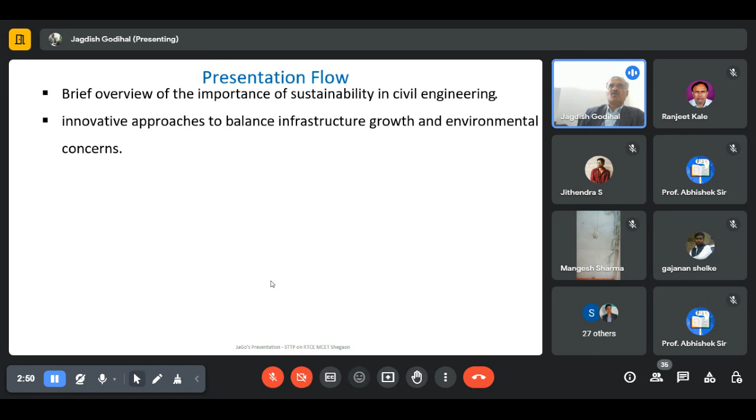We cannot neglect development, but at the same time, not at the cost of the environment. So we have to find a via media, a solution so that development happens while the environment is also protected. That is the concept of sustainable development I'm going to discuss.

Then I'll talk about smart solutions, especially regarding materials - how using smart solutions I can recycle materials so that natural raw materials stay intact. Using these recycled materials, I need to characterize them so I can use them as fillers instead of 100% raw materials obtained from natural exploration.

I'm going to use the majority of recycled materials where smart solutions are required - that is the concept of smart solutions and their application in infrastructure development. Then we developed a concept called the smart dwelling system, where we actually conducted experimentation and practicals.

We erected small cubicle buildings wherein we used sensors and IoT to monitor the thermal measurements as well as air pollution within the dwelling we developed.

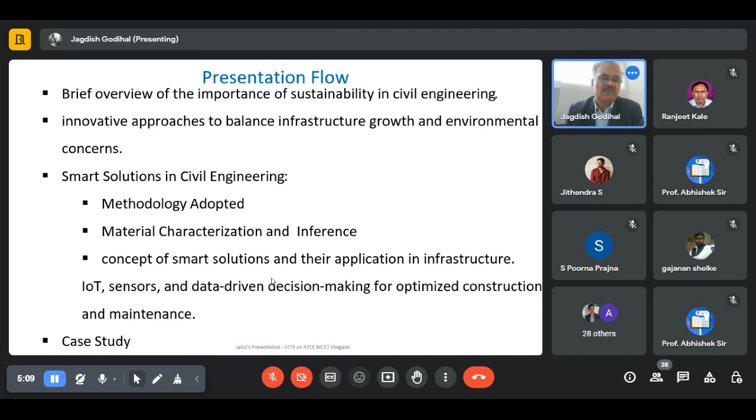Lastly, I'm going to talk about the case study of what we are doing now, and finally summarize with a take-home message. This will take about an hour, and after that, we can have a discussion. If anyone has questions, you are free to ask.

Coming to that, first, when we talk about sustainability and technology, we can talk about the integration of the two. First we try to understand the environment framework. As we are aware, the environment is the physical surroundings where we all live together and interact with physical, biotic, and abiotic components.

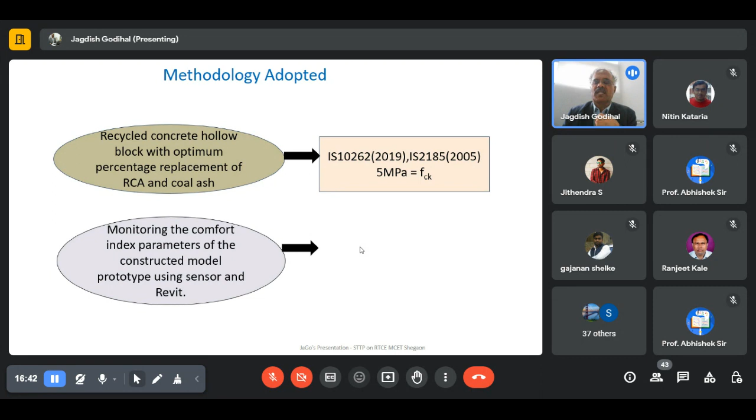Using these two materials, we are preparing the blocks catering to IS specifications, where a minimum 5 MPa strength is required to be considered load-bearing in concrete manufacturing. We are monitoring comfort index parameters using sensors and IoT in the constructed models. Three prototype models were constructed, and we analyzed the data using software, with respect to thermal comfort, overall comfort index including pollution level, and temperature and humidity monitored using sensors mounted inside the model.

If you look at the flow diagram of this study on recycled coarse aggregate and coal ash, the study outcome complies with three dimensions of sustainability: social, environment, and economy. We refer to IGBC, World Health Organization standards, American code systems, and Indian code systems while preparing the concrete for manufacturing the hollow blocks.

We have created some cavities in the hollow blocks, and in those cavities we are filling agricultural waste, whether it's areca nut, rice husk ash, or coconut fibers. These act as thermal insulators.

This is an experiment we have done so that by using recycled concrete aggregates instead of natural aggregates, we reduce greenhouse gas emissions, that is, carbon emissions. That is also an environmental index we try to work out.

We also look at direct and indirect costs, from an economy point of view, we're talking about three dimensions here. One is economy: we are not using 100% natural aggregates, 100% natural sand, or 100% natural cement, the ingredients required to prepare concrete, as you are all aware. We try to reduce these without reducing the requisite compressive strength needed to construct the building.

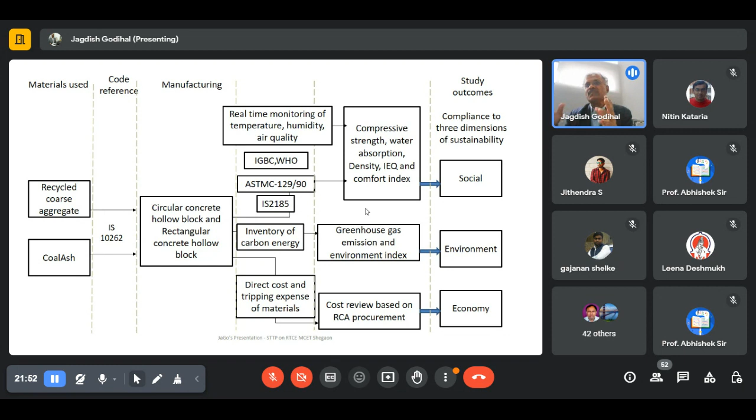From the social point of view, we are talking about the comfort index within the building. When we talk about comfort index, we mean achieving it without using artificial comfortness, in the sense without using air conditioners, as well as without artificial daylighting. That means using materials in construction, using materials as fillers, and changing the construction methods. We try to achieve a comfortable index which will be more effective from the health point of view with respect to the social dimension. This is what our study is concerned about.

Here we are using the concept of sustainability as well as technology. So these are the materials we have used: natural materials as well as recycled materials. We have used all these things.

These are the different proportions, whether it is rectangular hollow blocks or circular hollow blocks, like that. From that angle, we are using recycled concrete aggregates, and natural coal ash at 0%. That is the natural mix, mix 1 to mix 9, with different proportions of coal ash, as well as recycled concrete coarse aggregates and recycled concrete fine aggregates. These different mixes we have prepared, and then tested in our lab and all those things.

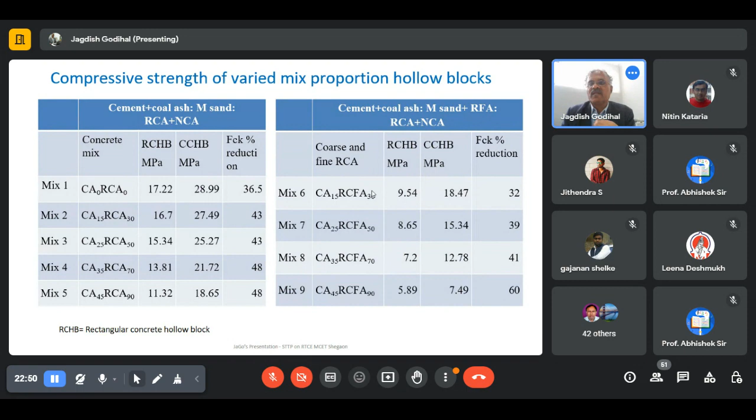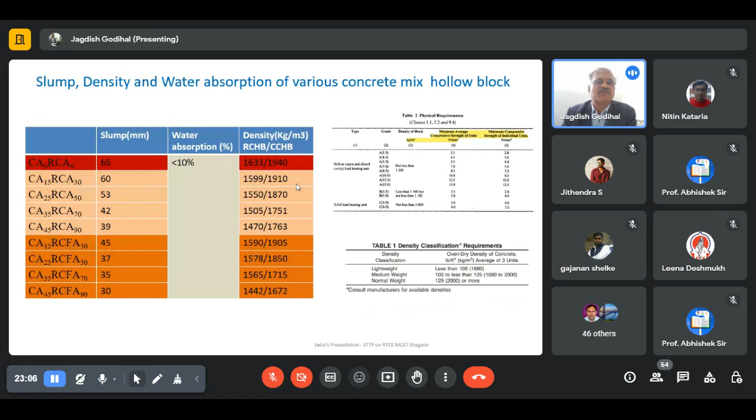Ultimately, we found out what compressive strength we are getting. This study has been done very judiciously, and from that angle, prior to that, many tests have been conducted. These are all the tests we have conducted, and these are the results we obtained, which are falling in line with both IS codes as well as the American concrete codes and all those things.

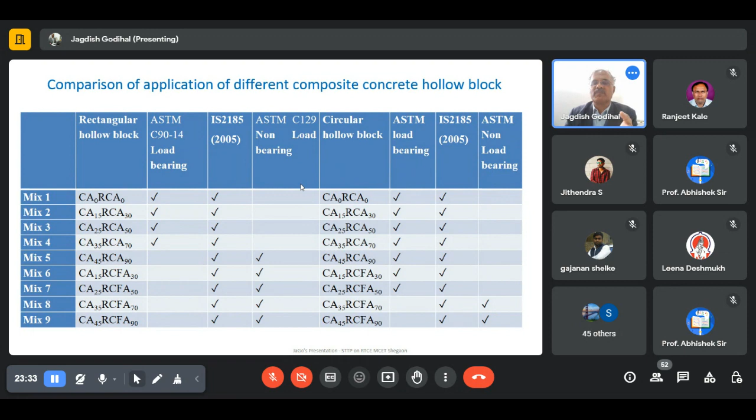If you look into the comparison of ASTM, that is American code, as well as Indian IS codes, we compared both rectangular as well as circular hollow blocks, to determine for non-load bearing applications which mix will be suitable. This is what we did. Then ultimately, how we decided this mix and all those things is based on the analysis.

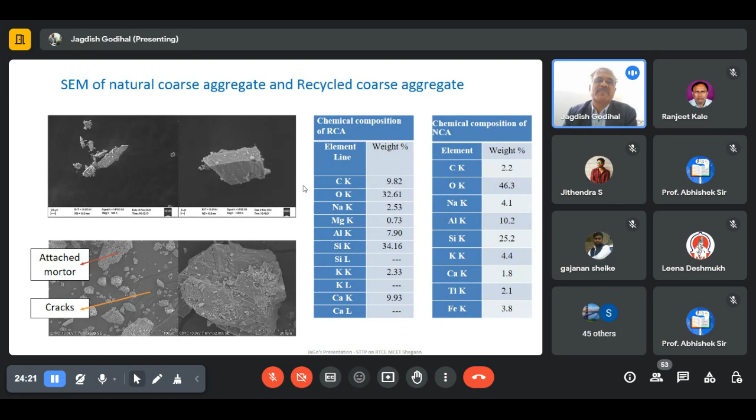We have done the material characterization, and its impact on strength and thermal performance. We have done material analysis with SEM of natural aggregates as well. Then chemical composition analysis, this is very important, so that ultimately you can decide the proportion of the mix where it will be gelled together, and produce concrete which should be almost the same as natural materials. So this analysis, whether EDX or SEM analysis of both natural and recycled coarse aggregate, is very important to decide the proper mix. That is what we have done.

Based on that, we have done some characterization inferences. The ash with higher content of unburned carbon has more porous and vesicular texture, and consequently crushes more under compacting and loading. That means we need to strengthen this. How are we going to strengthen this?

Why are we doing this material characterization? To understand the SWOT: what is the strength of this material, what is the weakness of this material. So that means we are talking about composite materials, we are making a composite. Concrete, you know, concrete is a composite material. Ultimately, the strength of one material we try to incorporate to address the weakness of the other material. Then we are going to come up with a very good material which can achieve the desired property, whether it's for load bearing or non-load bearing activity, whatever you want from that angle. So then again, we have done the thermal conductivity of the concrete, because we are talking about thermal index.

We're talking about thermal comfort within the house, 365 days. When it is 365 days within the house, we already mentioned we are not going to use any artificial air conditioning. We want to keep intact a conducive temperature of 20 to 25 degrees throughout the year. So here we talk about the materials used in construction, materials used as filler materials, and the method of construction.

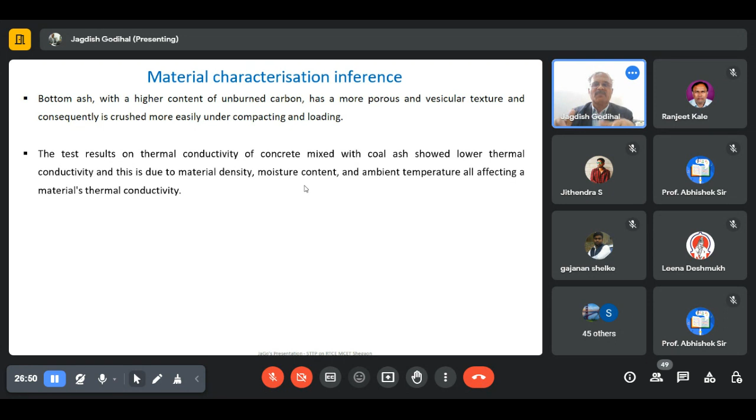We also talk about the indoor environment and indoor air pollution. That means the pollution barriers - how these materials, whether construction materials or filler materials, will act as pollution barriers and arrest the pollutants entering into the house. From that angle, the study is going on.

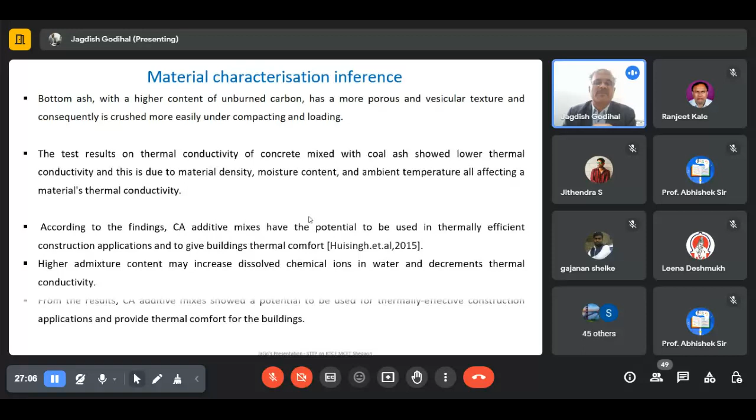In order to get the desired strength, sometimes we are using additive mixtures - admixtures we are going to use. These are all the things we did.

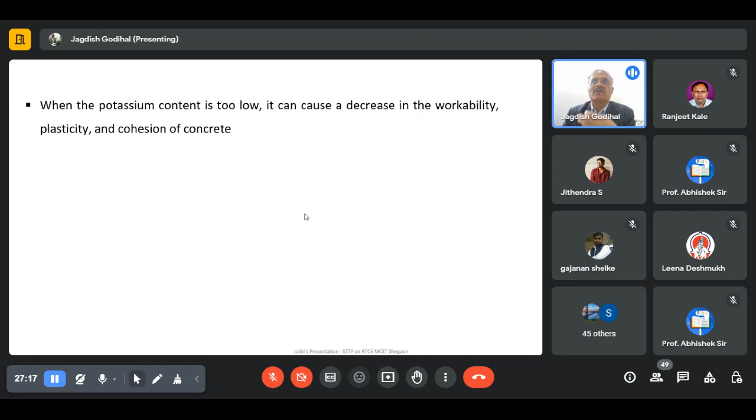From the SEM analysis, we found the potassium content is low, and that's why there is a decrease in the workability, plasticity, and cohesion of the concrete. So we tried to improve and make up for that. That is what we did.

Then again, the effect of recycled concrete aggregate on thermal conductivity, reduced from 1.2 watt per m-K composition for natural aggregate, that is 100%, down toward 0% in the concrete mix - meaning we talk about using recycled aggregate instead.

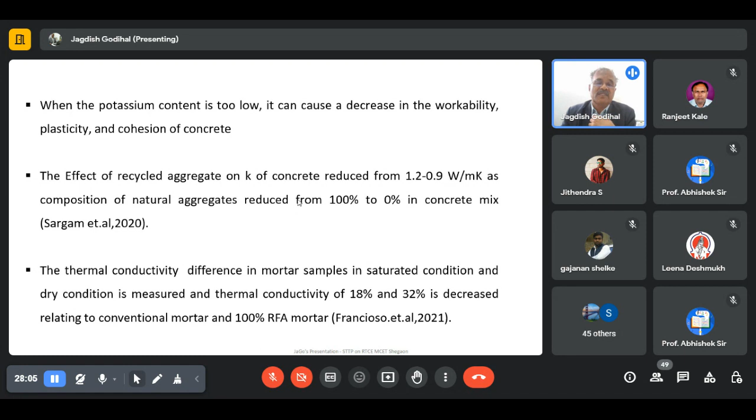Then the thermal conductivity for dry conditions showed an 18% and 32% decrease related to conventional mortar when using 100% recycled fine aggregate mortar. This is based on literature we have taken, and using this we conducted the experiment.

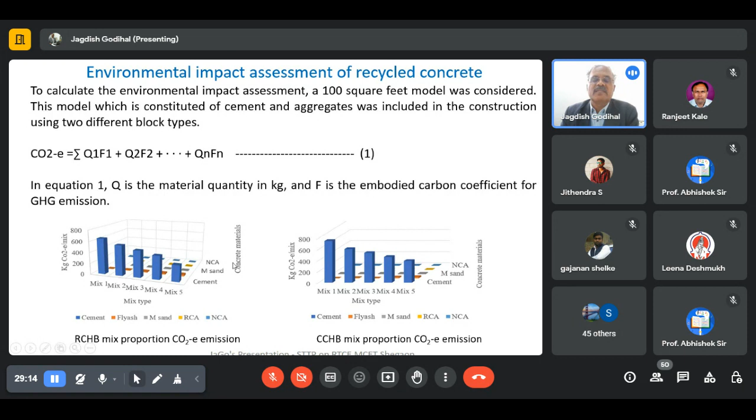We calculated how much greenhouse gas emissions will occur based on the different proportions. As you reduce more cement and use more natural aggregates, you get less carbon emissions. That is what the study shows.

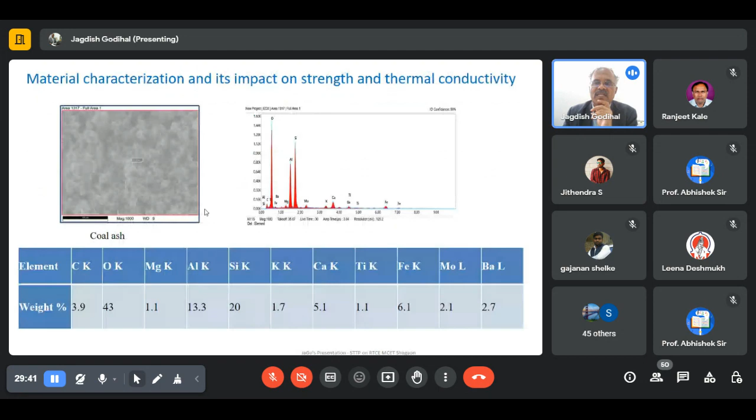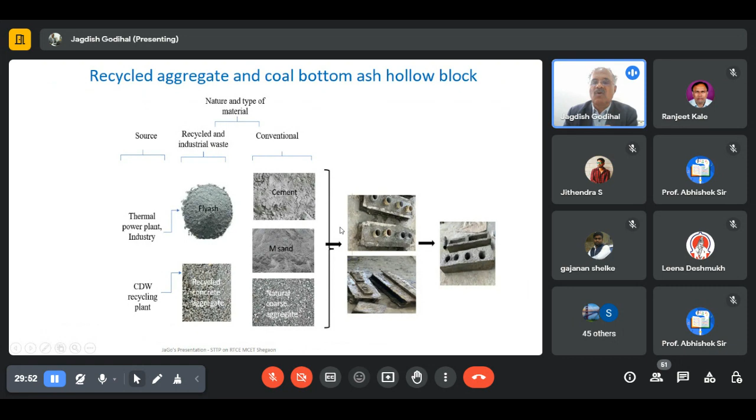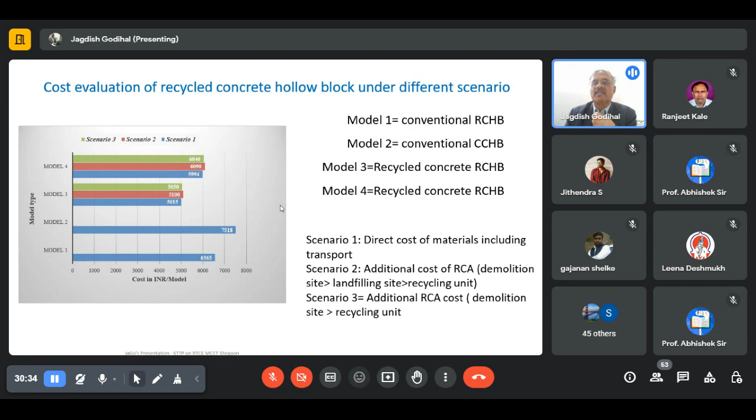In these cavities, we filled sugarcane bagasse as well as coconut fibers as filler materials. This is the study done with respect to economy - how far we bring these recycled materials and the related cost. We considered three scenarios: direct cost of material including transport; additional cost of RCA from demolition site, landfilling site, and recycling unit; and additional recycled concrete aggregate cost.

Then the second part, we talk about the monitoring - meaning the models we constructed. We are comparing these with blocks, the units constructed using the available blocks in the market.

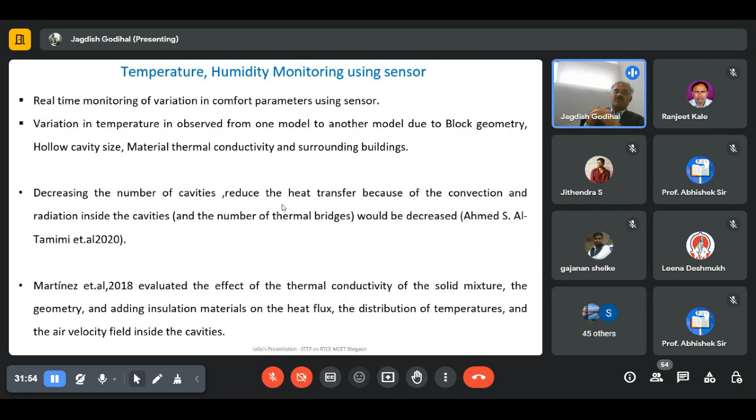Those blocks are made out of full natural aggregates and full cement, with no recycled material used and no cavities. That one block we have constructed. Then for the remaining two blocks, we manufactured hollow concrete blocks with cavities, both rectangular and circular. We monitored all the thermal as well as humidity parameters from that angle, and then compared which one, rectangular or circular cavity hollow block unit, is more comfortable with respect to thermal comfort as well as comfort index.

This is the experimental setup we have done. These are the units we completed: natural blocks without cavity, rectangular blocks with cavities, and circular cavities in a rectangular block. Along with that, we have used sensors, which you can see here, to take the readings.

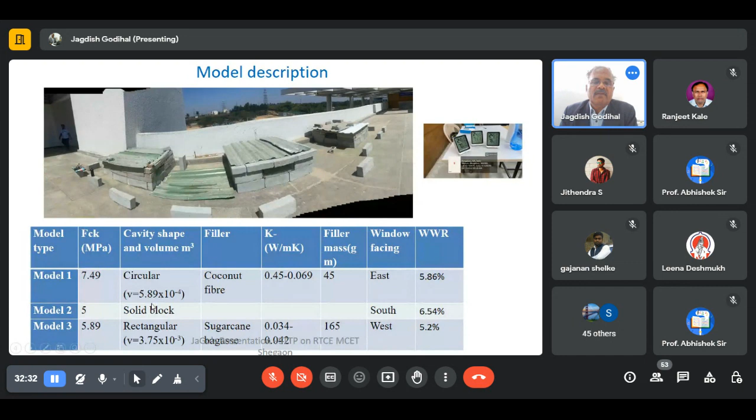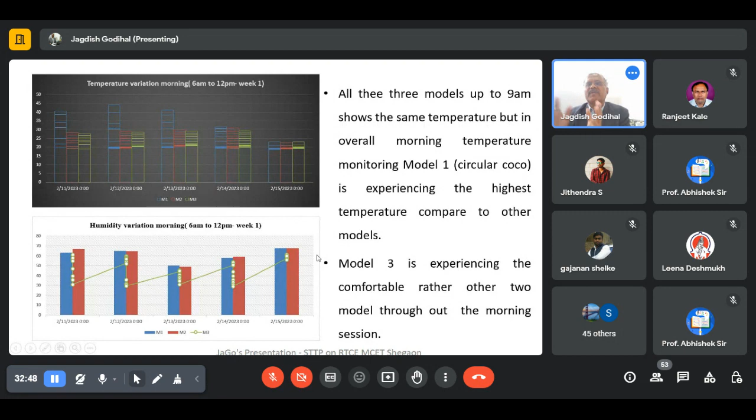So we ran this model and monitored from 6 a.m. to 12 p.m. in week 1, and again 6 a.m. to 12 p.m. in week 2, for humidity and temperature variation in model 1, model 2, and model 3. Then again from 12 p.m. to 6 p.m.

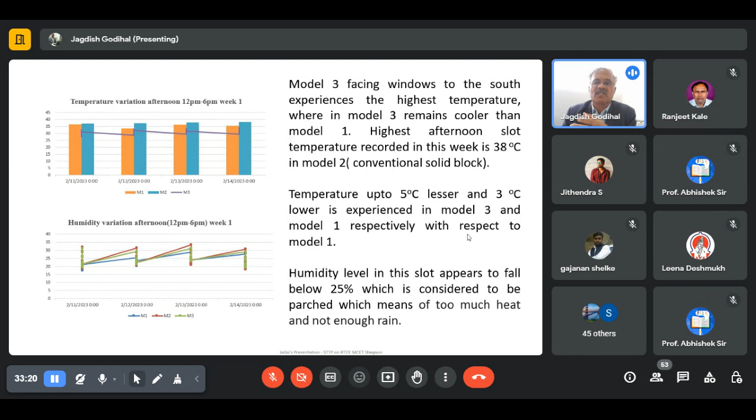We observed the temperature was up to 5 degrees lesser in model 3 and 3 degrees lower in model 1, with respect to model 1 as a reference. When analyzing the data from these three models with respect to thermal comfort and pollution comfort, we reached our conclusions. We monitored again from 6 to 12 morning, 12 to 6 evening, and 6 to 6 through the entire night, using sensors and an IoT-based system for temperature and humidity.

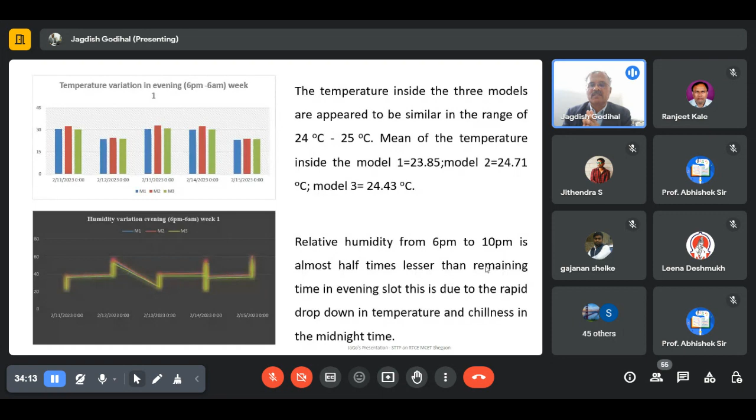Now, if you look into the temperature inside the three models, it appears similar, in the range of 24 to 25 degrees Celsius, with the mean temperature around that. The relative humidity is almost half as much lower in the evening slot due to the rapid drop in temperature and chillness at midnight.

So here is a brief summary of our study. Looking at the rectangular hollow blocks, we used coal ash at 35%, which is the replacement for cement, along with recycled concrete aggregate at 70%. This can be used as load bearing. With this proportion, we achieved a compressive strength greater than 13 MPa, which holds good for both ASTM code and ISI standards, where ISI requires greater than 5 MPa while ASTM requires 13 MPa.

However, the addition of recycled fine aggregate as a replacement for M-sand failed to meet the ASTM standard. When replacing manufactured sand with sand, it does not meet the ASTM standard of 13 MPa, though it still meets the IS standards.

Again, looking at both ASTM and IS cases for circular hollow blocks: with coal ash at 25% and recycled coarse and fine aggregate at 50%, or coal ash at 35% and recycled concrete aggregate at 70%, both proportions satisfy the ASTM as well as IS codes.

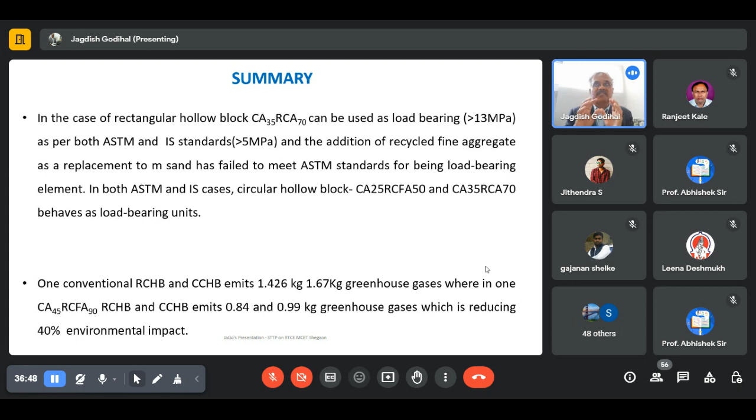From the cost dimension of sustainability, the cost of one conventional rectangular cavity hollow block and circular cavity hollow block is 58 and 42 Indian rupees respectively.

If you're going to have this proportion of coal ash 45 and RCFA 90, then you're going to have only 23 and 28. This is how the reduction of almost 50% in economy.

Then again, if you come to the thermal conductivity, coal bottom ash and cement differ in physical and chemical properties, which we determined through SEM analysis. From there we got these parameters. Coal bottom ash has a lower thermal conductivity, which is what we wanted, due to its insulating material, porous structure, and low density, while cement has a higher thermal conductivity.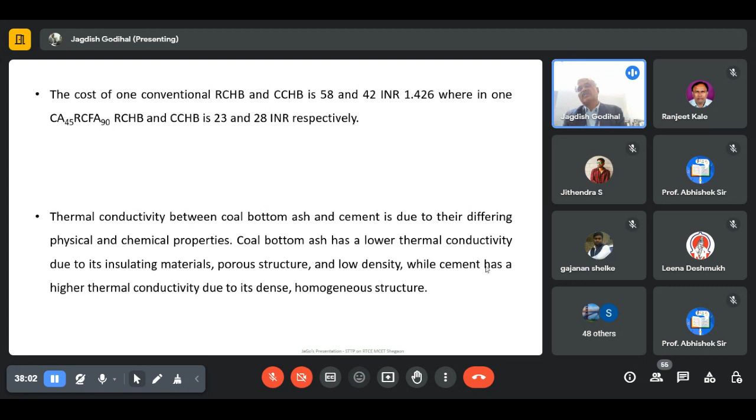Thereby I can reduce the transmittivity factor. So if you are using cement, during summer more heat will be transmitted through the body. We are also making cavities and filling them to reduce the transmittivity of temperature from outside to inside, and from inside to outside during winter. That is what we did from that angle.

Again, as I mentioned, monitoring is done 6 to 12 afternoon, 12 to 6 evening, and 6 to 6 through the entire night, from that angle. We analyzed this data and got some results, and this is how we got to know.

So if you look into it, yes, it is possible that using technology and recycled materials - the waste products of industry, waste products of construction and demolition - can be effectively utilized through technology so that we can reduce considerable impact on the environment, and also on the social aspect of the population. This is what the study concludes.

I'm happy to note that almost 4 to 5 papers in very good reputed journals are under review, and they are going to come out. Definitely you people will be able to read the finer aspects of our study, and then you can take the study further to a higher level, so that together we can make it into a reality.

How to go for infrastructure, sustainable infrastructure, using recycled construction and demolition waste as well as industrial waste. So that means we are going to serve two purposes: one is the exploration of natural material will be reduced, and also the dumping of waste will be reduced. Thereby sustainability can be achieved.

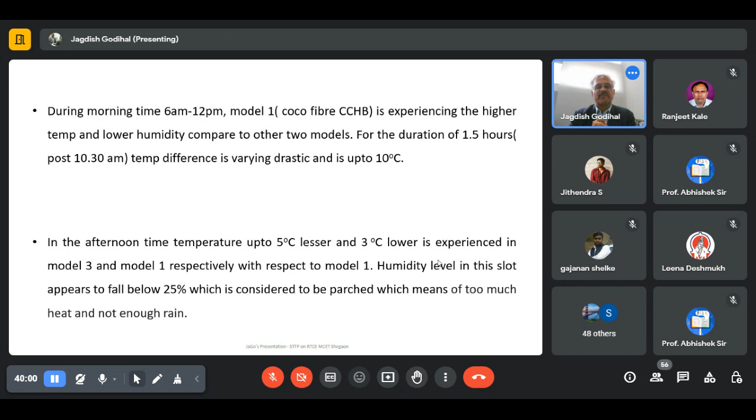So with this, I have got an equation called the Jago equation of sustainability - I always talk about this in every presentation. So here, as I mentioned, sustainability - that means now we talk about the capacity, environmental capacity, whether to produce natural resources and to assimilate the waste that you are discharging. So sustainability must be equal to 1.

If you want to achieve sustainability equal to 1, then we must know environmental capacity is finite, not infinite. That is why I kept EC minus, that is the rate of resource consumption. That is what my presentation talks about - utilizing recycled materials, how we are going to utilize recycled materials more and more so that we can reduce the exploration of natural materials. That's why EC minus RRC.

We have to reduce the disposal of waste. When we try to use recycled material in our main activity through technology, it's ultimately going to help the waste assimilation capacity of the environmental capacity. That's what I wanted to say. So that means we try to get S equal to 1, meaning S should always be positive. If it comes negative, then ultimately sustainability will not be achieved.

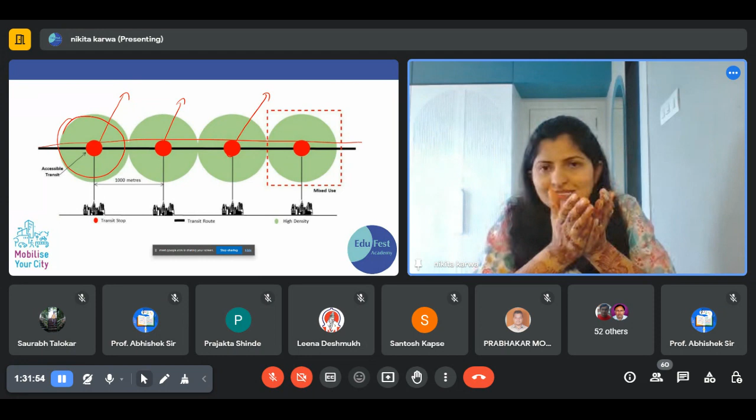For example, if I am living in Pune, but the nearest metro station, if I consider, is 2 or 3 kilometers away from my house. So tomorrow if that line starts, but my problem is should I walk 3 kilometers, or go 3 kilometers by bike, and then catch the metro from there to go somewhere - that is not going to be useful, right? That is not going to help me. So don't let the city spread out, make it compact, make it as near as possible.

See the basic definition: TOD is a type of community development that includes a mixture of housing, offices, retail, and other amenities integrated into a walkable neighborhood.

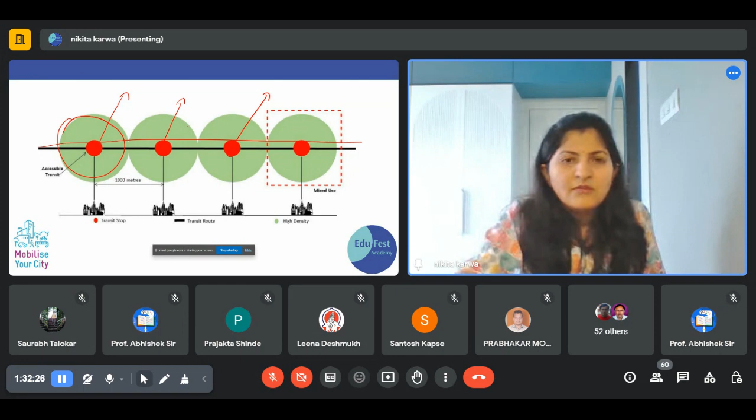What is a walkable neighborhood? It means my office is near my house, my shopping complex is near my house, everything is at one location, at one place. For coffee, I don't need to go to some CCD or a very long place.

Within half a kilometer, I can get everything: hospitals, bookshops, stationery shops, schools, markets, shoe repairs, everything. Then it becomes a compact city, and for that this TOD policy is used. So what is the TOD concept? Make the development as near as possible to the transportation node and make the city walkable.

Make the city walkable. Within half a mile or a quarter of a mile, we have to give all the facilities that are there.

I have been to Japan, and there, suppose I am living in one area. It is compulsory that my child will go to that area's school only. Like our Aadhaar card, there is one card over there, and if it is written that this is your address, no school will give you admission other than your area school.

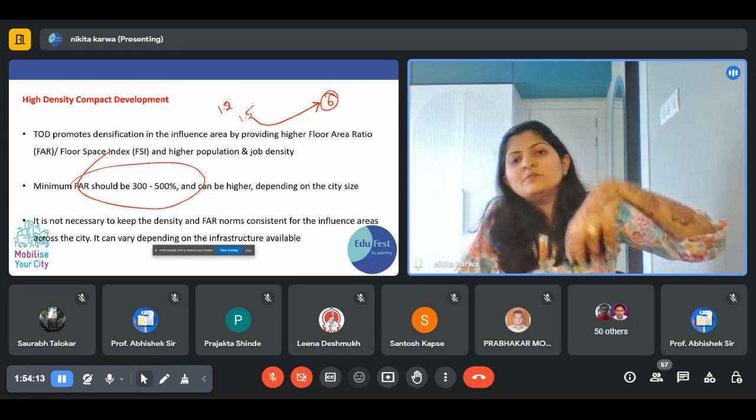मतलब जो भी FSI जो दिया है, that has to be increased to 300 to 500% depending upon the city size. Normally basically 1.2 basic FSI होता है, 1.5, but along the transportation node it has to be increased to 6, so that the builder will come up with the redevelopment projects, and then the compact city is going to be developed.

See, I have the last point which is multimodal integration. As I have said, yes, we need this metro, I have to take this metro, my aim is to go to the office, but for home to metro, ये जो रास्ता है वो चलाने के लिए we should have a para transit system, intermediate public transport, non motorized, it may be NMT or it may be IPT.

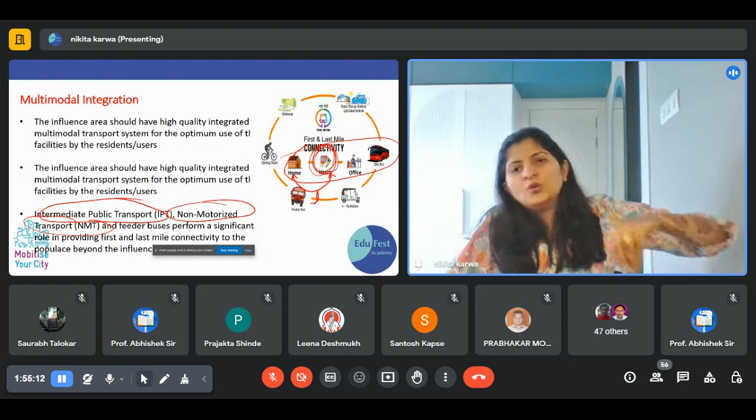So intermediate public transport मतलब it may be an auto rickshaw, it may be a cycle, it may be my private vehicle too. If there is some parking space at Pune metro, Kothrud metro station, I will park my two-wheeler over there, then I will go by metro to my office, and when my returning journey is there, I will come back with my vehicle.

So this intermediate public transport also plays a vital role for successful implementation of this metro, right? So this is a live example, some examples which I have taken a screenshot from Twitter only. See, this is modern Nagpur, jahan zero mile TOD project has been given.

Commercial space in 20-story, 90-meter building, station at 4th floor on 2.5-acre land parcel with FSI 3.5. So we are on the verge to go vertical. This is how the TOD can be achieved, by making as many projects near to the transit oriented node.

Look at this Pune Metro. So master plan at Range Hill depot, 1.5 lakh square feet and all these things. So to make it successful, we need a proper coverage.

To make a proper coverage, we need a compact city, and to make it a compact city, we need more FSI near the transportation zone. So wherever there is metro, MRT, BRT, there is TOD policy all over India. It has to be increased 300 to 500%. Most probably 5 to 6 FSI has been allotted along the transportation node. So this is how we can achieve it.

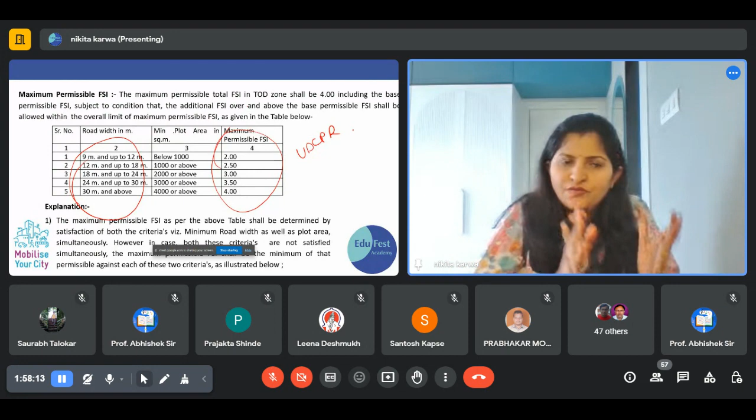This is one more thing about the PMC policy. A last question in your mind would be: we are going vertical, but what about the road width? If 10,000 people live in one building, that many people will come out on the road to go to their office. What is going to happen? It is not like that. In every UDCPR, road width is always associated with FSI. At 9 meter or 12 meter road, you are not going to provide 4 FSI, obviously it is 2 FSI. If the road right of way is above 30 meters, then only 4, 5, 6 FSI can be achieved. So there is an interlink between road width, FSI and TOD policy.

You can go through the UDCPR sections, it is beautifully designed with road width and FSI. I hope you have a basic knowledge about this DCPR, but it is too much interesting to read in the UDCPR. So this is how we can achieve the TOD policy in our cities, to make it sustainable transportation. Thank you.